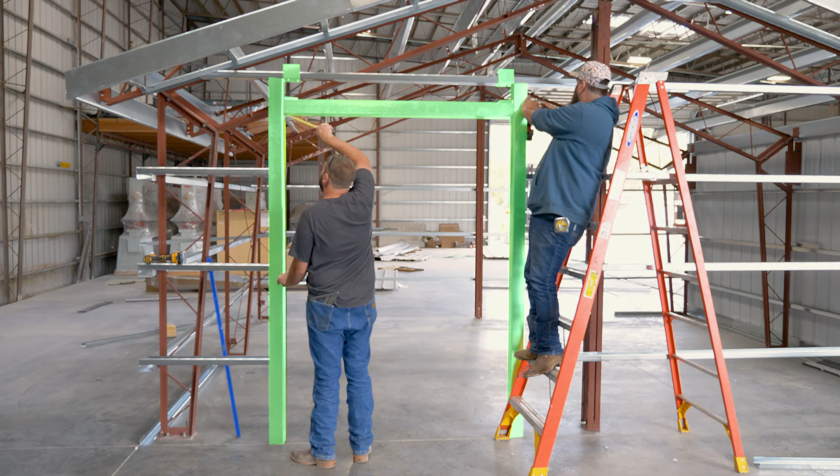Now that your overhead door framing has been installed, it's time to install your overhead door trim. The overhead door trim is designed to wrap around the door structural framing and trim out the wall panel on the exterior of your building. Since our building uses 3 5/8 inch deep girts, we will use the SP36 overhead door trim identified on your sheet metal trim packing list.

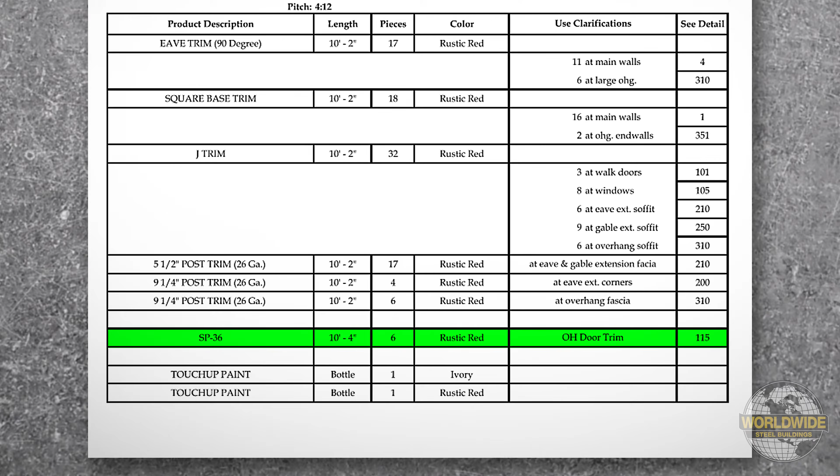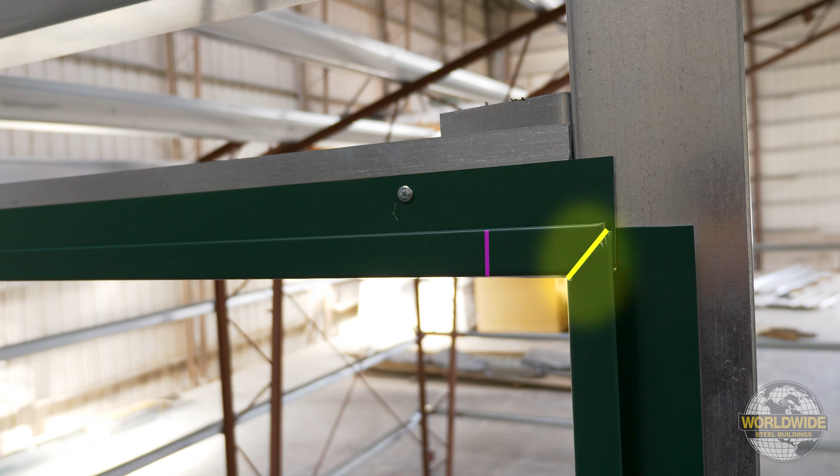Our jambs will have a mitered corner at the top of the jamb trim. Since the face of the J-trim is 1 inch wide, we will add 1 inch to our 84-inch measurement to accommodate the miter. Therefore, our overall trim length will be 85 inches. Measure this distance on the trim and cut to length.

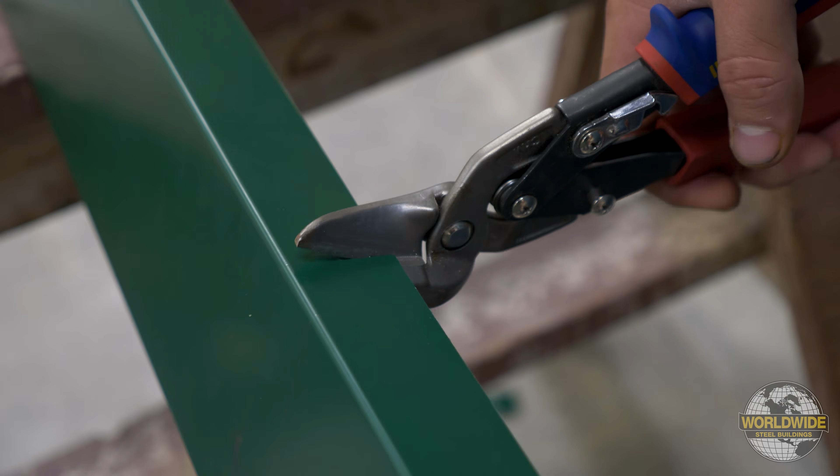Measure 1 inch from the top end and draw a line across the jamb face cover, exterior panel J-trim cover, and jamb back leg cover. You will also mark a line from the end of the trim down to this line across the jamb face cover, lined up with the jamb front leg cover. Cut along the mark on the jamb back leg cover to the corner as shown.

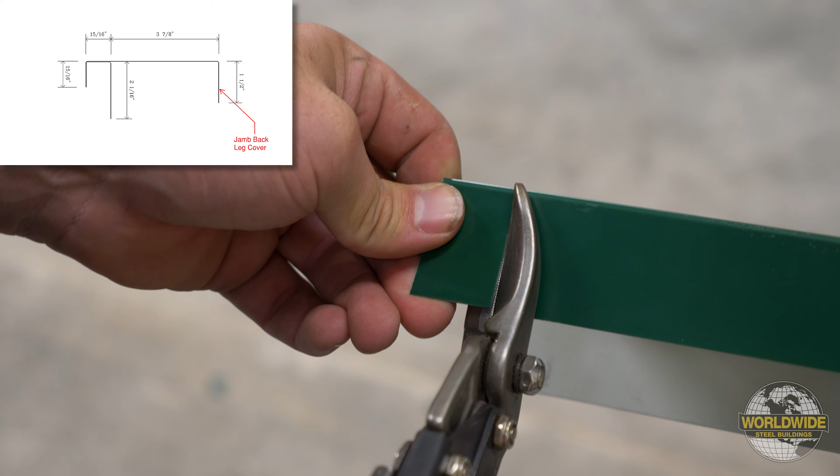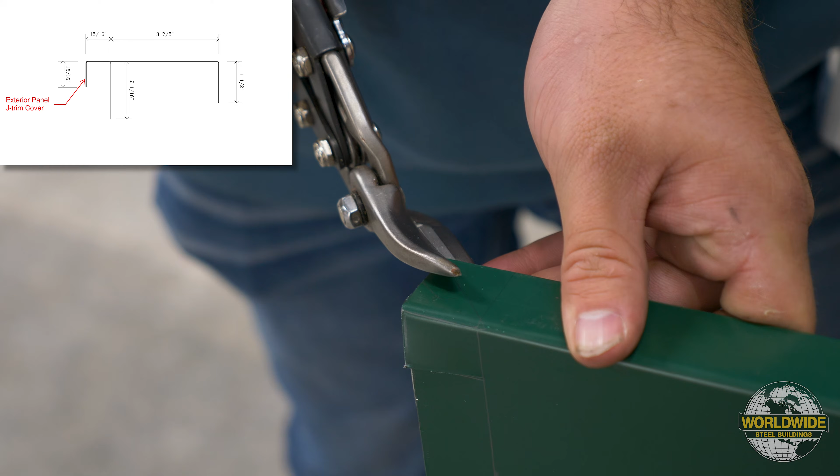Then, cut on the line at the jamb front leg cover from the top of the jamb face cover down to the 1 inch line. Then, on the panel J-trim cover, from the highest outer point, cut diagonally across the trim down to the mark. This creates the mitered corner on the trim when installed. The small tab created will need to be removed. You can bend it back and forth several times and it will snap off.

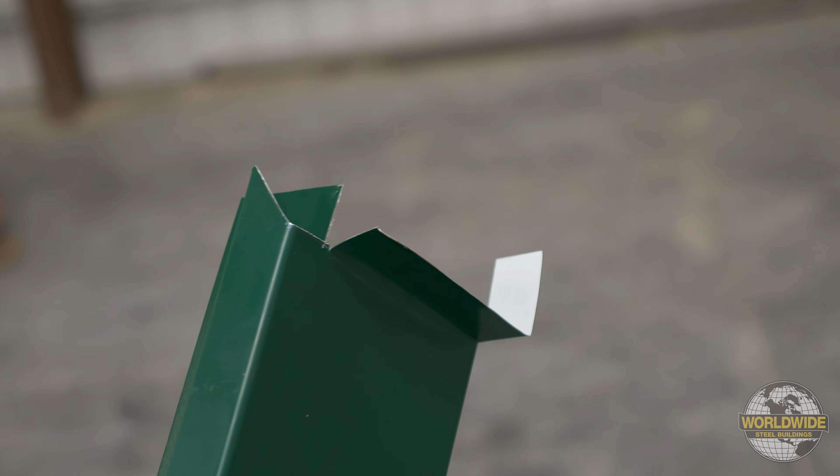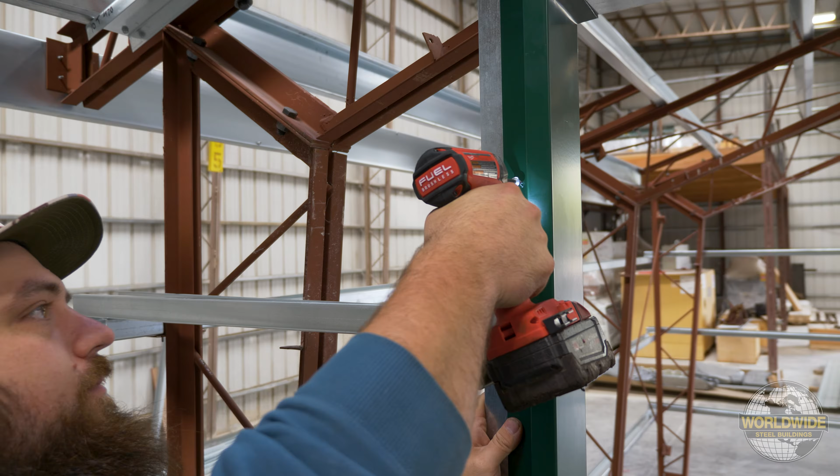You can now bend the jamb face cover outward at the 1 inch mark to create a 90-degree bend. Your jamb trim is now ready to install. Place the bottom of the trim around the overhead door framing and then push the top of the jamb trim into place. Secure using pancake head self-drilling screws at 1 foot on center on both the front and back side of the trim into the door jamb framing. Repeat this for the other jamb on your door.

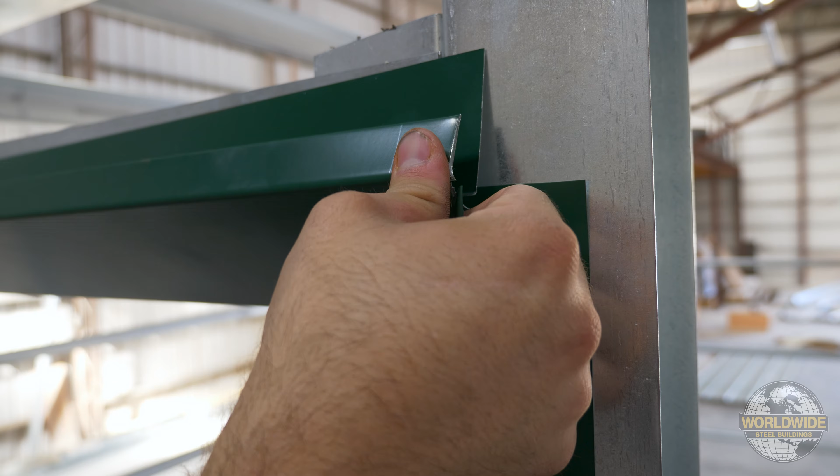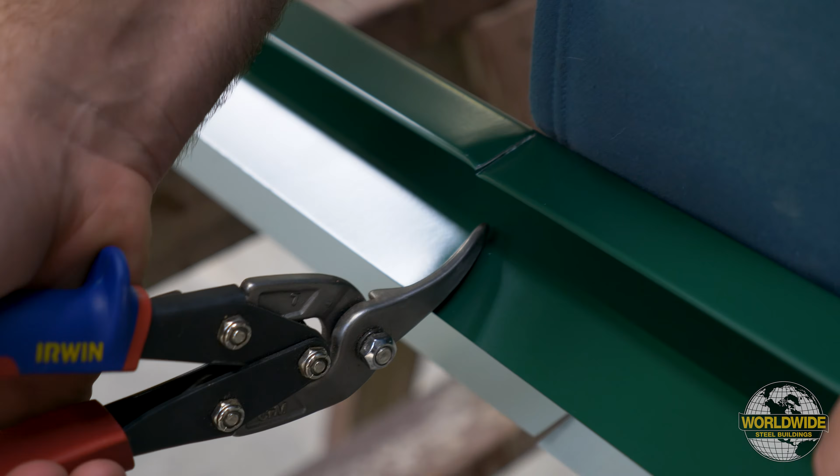Once both jambs are installed, you may proceed with your door header trim installation. For your door header trim length, measure across your door header framing to the top outside edge of the exterior panel J-trim cover. This will be the overall length of your door header. In our example, this dimension is 61 inches. Measure and cut your door header trim to length. The dimension from the inside of the right door jamb to the inside of the left door jamb should measure 59 inches, which is 2 inches shorter than the door header trim length.

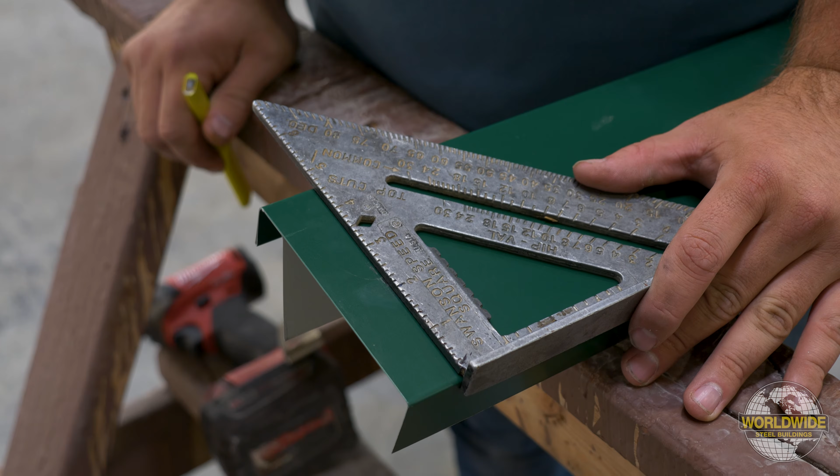Measure 1 inch from each end of the header trim down the jamb face cover and make a mark. Draw a line across the jamb face cover at this mark. Continue this line across the exterior panel J-trim cover and the jamb back leg cover. Then, at the jamb front leg cover, make a mark from the end of the piece down to the line you have drawn. Cut the jamb face cover from the end along the last mark you have drawn, down to the 1 inch line drawn across the jamb face cover.

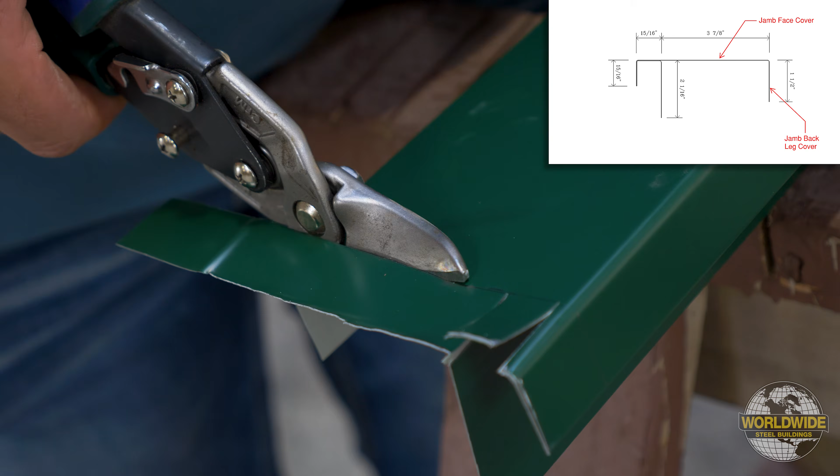Then, at the outside corner of the exterior panel J-trim cover, cut from the end of the piece down to the 1 inch line drawn across the jamb face cover. Finally, along the 1 inch mark, cut the jamb back leg cover and the jamb face cover, stopping at the tab you just created. Do this at both ends and bend the tab you created up so that your door header trim looks like this.

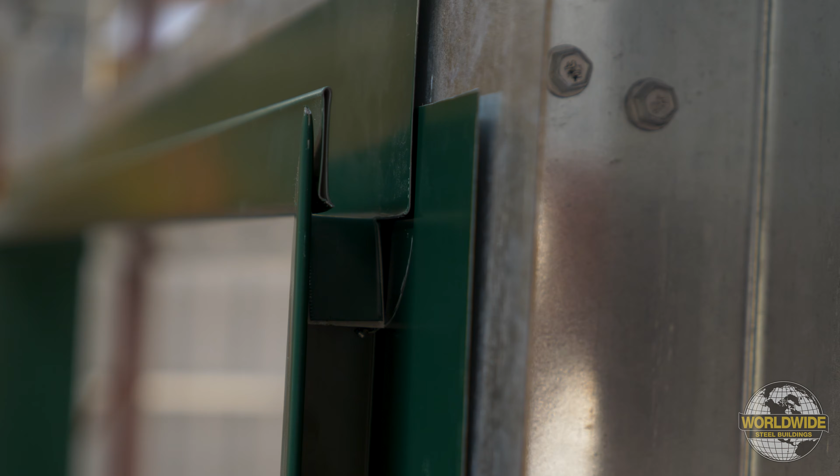You are now ready to place your door header trim on the door framing. The tabs created should overlap the door jamb and will be bent downward over the door jamb trim as shown. This creates the appearance of a mitered corner. Secure your door header trim with pancake head screws at 1 foot on center along the front and back sides of the door header trim into the door header framing.